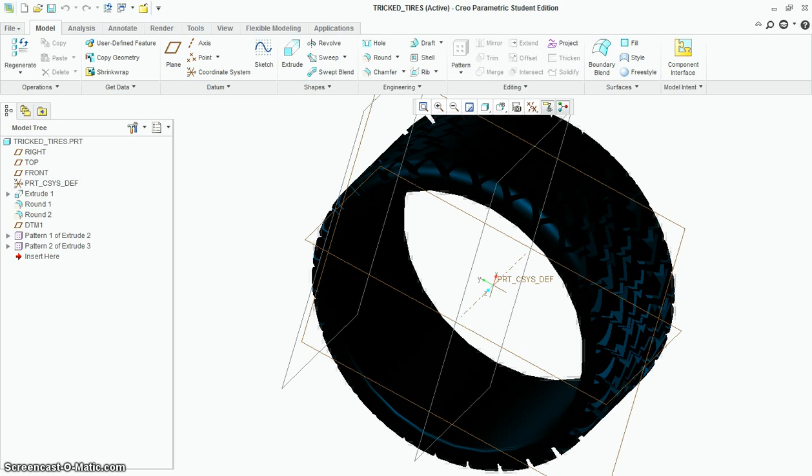Okay, this tutorial is on tricked out rims that will fit your tricked out tires. So you always make the tires first, it's just a little bit easier, and then the rims are made to fit the tire.

So we made the outside dimension of our tire 48, and we made the inside dimension 40. Now you can do whatever number you want inside there. That means the outside of my rim will have to be 40, and you build the inside any way you want. I made these 22s, 22 wide.

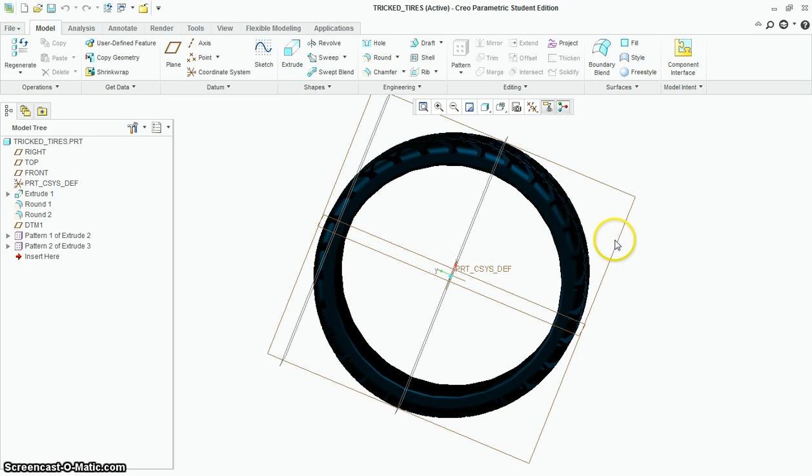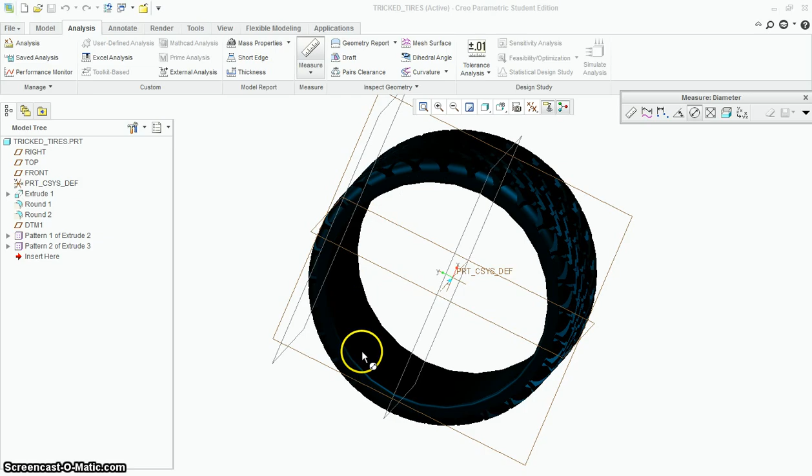So if you don't know what you did, you can check. You can go back into the file and open up the two-dimensional drawing. But I want to show you an analysis toolbar we have. You can go up to measure, and we can measure distance, length, angles, all kinds of things. I'm going to go to measure diameter, click on the circle here, and it says diameter of 40. So right on the drawing, I can come up with a measurement that'll help me determine how big to make the rim.

So then get out of this analysis, close out of this drawing, and we're going to start a new drawing, and this is going to be our tricked rims.

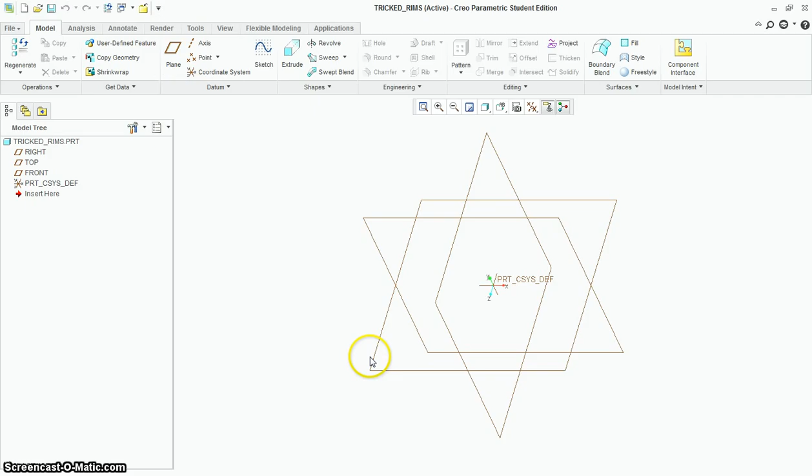Okay, so we're going to start this in a similar way that we did the tires. We're going to say extrude from the front, sketch view, and we're going to go 40. Don't make them 48, because they need to fit the tires. So 40, that's the outside of the rim.

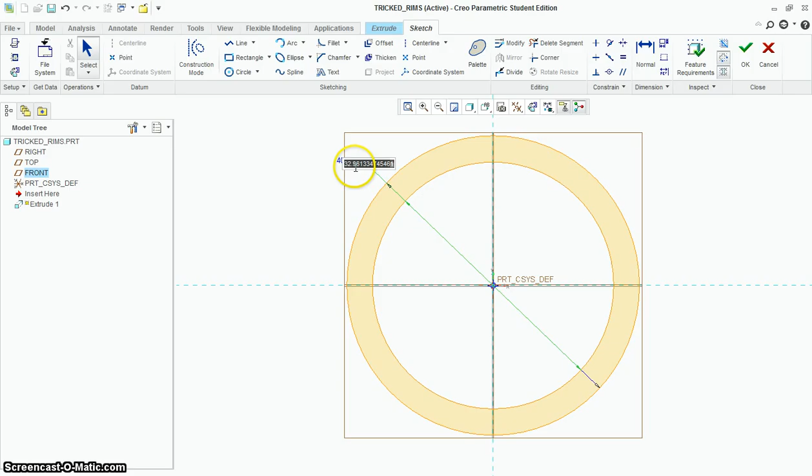Then the inside of the rim is whatever you want. So again, you pick the number, and I'm going to say, how about 38? Let's see what that looks like. Is that too thin? It's okay, alright, so we'll go with that.

Now you might want to opt to make the wheel hub right now, but I'm going to hold off on that, and I'll show you why as I get into this. You could make it now if you want, it just depends on what you're going for.

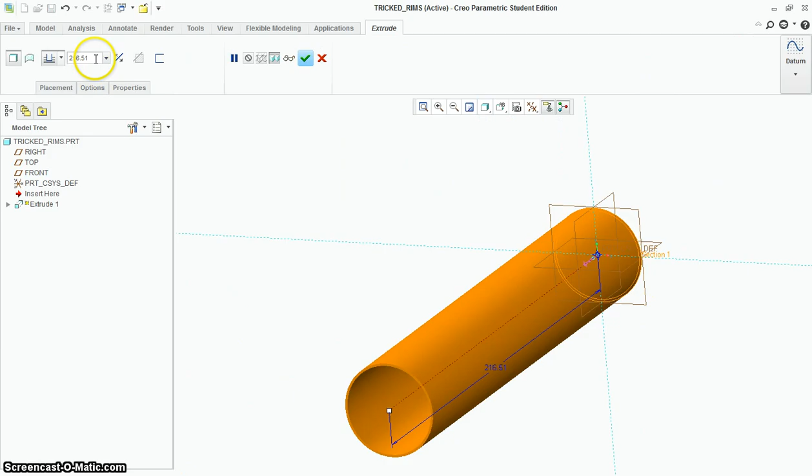So I'm going to go ahead and accept this. I'm going to go ahead and put in my 22s again, and there's my width. I'm going to go ahead and center this plane here. I don't know if I'm going to use it centered or not, but I'm going to go ahead and do that, and accept that. So there is the start of my rim.

Now why didn't I make the hub? Well, because I don't want the hub to come out as far as the rim. I want it to come out part way. This is just the style of rim I'm going to try to make.

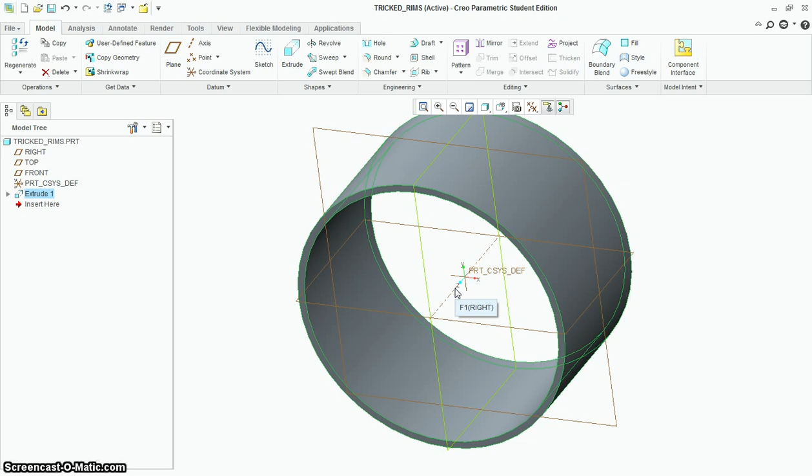So what I'm going to do is say, okay, extrude now from, well, you got a couple options, the back surface or this plane, or you could make a new datum plane, whatever you want to do. It's your drawing. And then go sketch view. And now I'm actually going to make the hub. So I'll just put this in here.

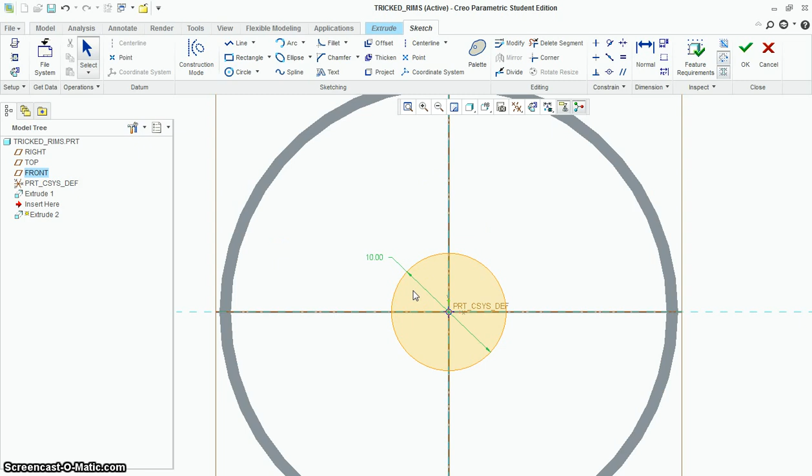This could be whatever size you want. I would recommend you use kind of whole numbers, it'll just make it a little bit easier for you to go back and figure out how big stuff is as you draw it. And when you accept that, you can see that it started here, and then I'm going to have it come out to the edge of the rim, which is half of 22, or 11.

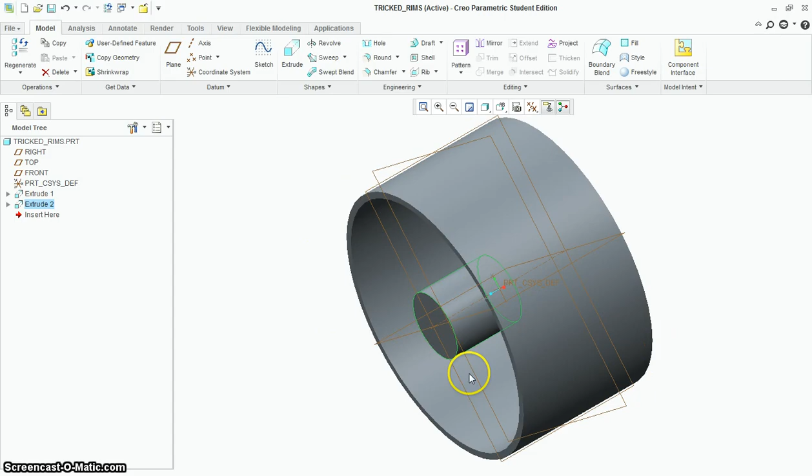So everything I'm doing now, just remember, is just how I happen to be doing it right now, not necessarily what you have to do. So there's a lot of freedom now for you to just make this your own. This is actually going to be the back of my rim, and this is actually going to be the front of my rim. So whether I picked front there or back, it doesn't matter, but as long as you know what you're doing. Okay, here's where things get a little tricky.

And I'll kind of give you a basic way to do this, and then a little bit more advanced way also. We need to make some spokes on the rim here, and so you could click extrude, and you could click this surface if you want, and you could draw some kind of spoke right here, and then we could pattern that around, and you could make it pretty basic.

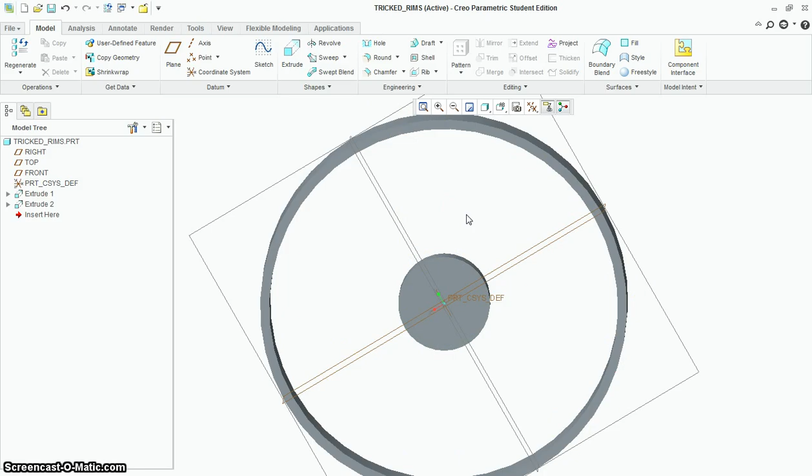And what I'm going to do is I'm going to use revolve, because I'm going to get a little bit more complex of a shape. So I'm kind of shooting for the moon here in terms of what the final product's going to look like. So I'm going to go revolve, and I'm going to click this plane right here, and then sketch view.

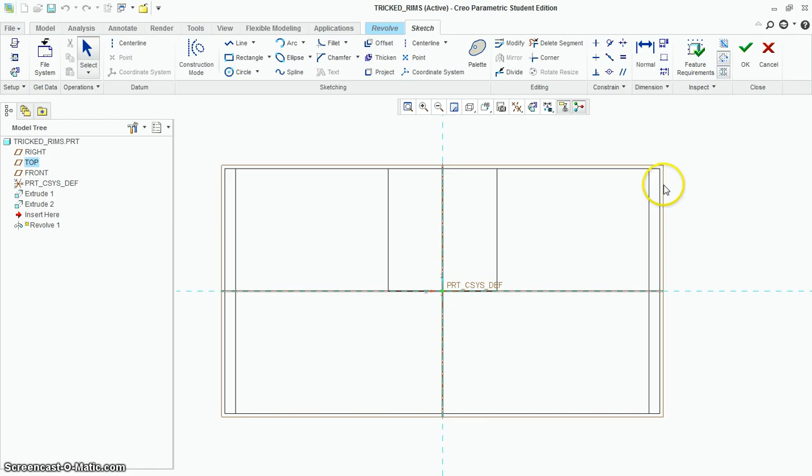Now I'm looking down on the rim, which might seem kind of confusing, but once you turn on your wireframe mode, you can see what you're looking at. Now I'm going to set some references. I'm not sure exactly where we're going with this, but here's the inside of the rim, here's the hub, here's that plane, here's the back of the wheel. I don't know what I'm going to use, so I'm going to set a lot of different things.

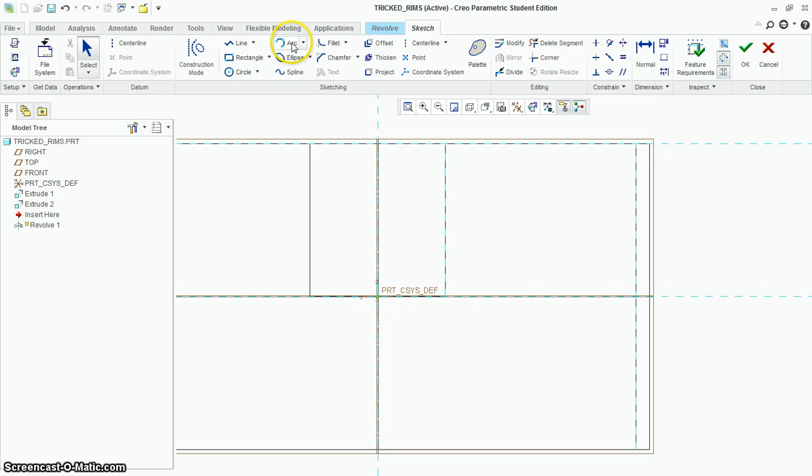And I'm going to make something that kind of looks angled. I'm kind of going for like an old IROC Z type of cool rim. So I'm going to go ahead and draw an arc in here, and I'm going to start it, let's see if it'll let me start it here. There, and pull it all the way to the center. And I'm going to have it come across here like this.

Now, you might be thinking, why didn't you just bring it to there? Well, remember this is rounded. So I'm going to bring it farther in to make sure it makes a good connection there and I don't have part of it missing. And then I'm going to do another arc right here.

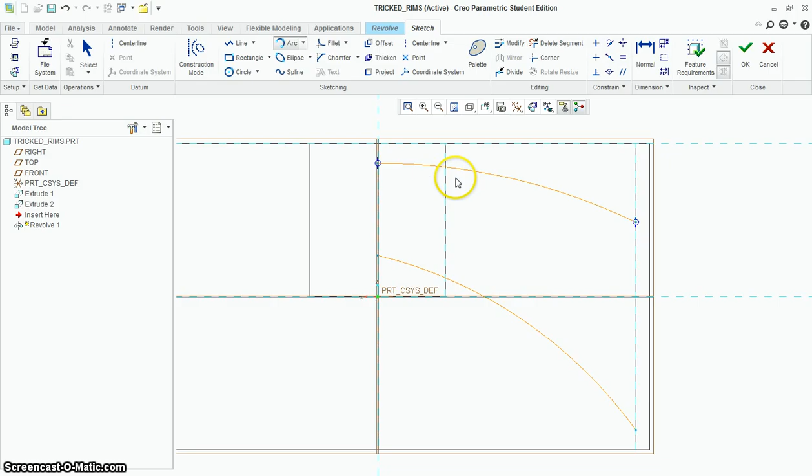And we'll just do something a little more subtle right here. Remember, you're doing a revolve, so you have to have a closed object, so close it again.

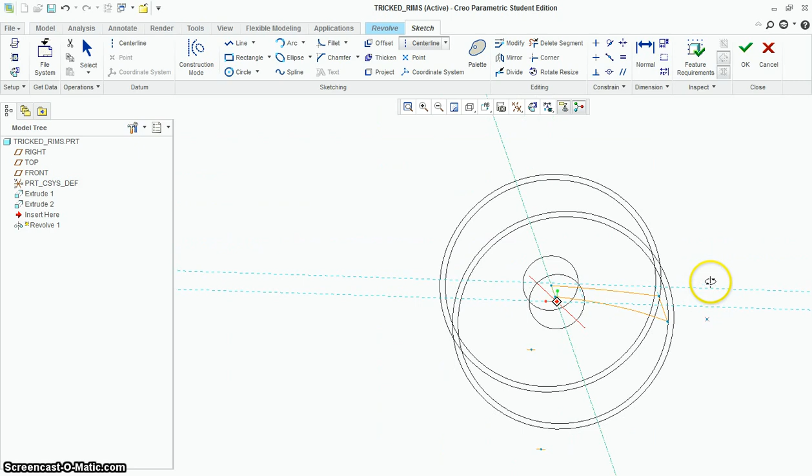Okay, so I've closed it. I've got this closed object. I need a center line because I'm making this revolve. Let's look at where we drew. I'm in this wireframe view, but you can see I drew on this top plane right here. If I go back to my shaded view, there's my shaded rim, there's where I drew, and I'm going to accept this.

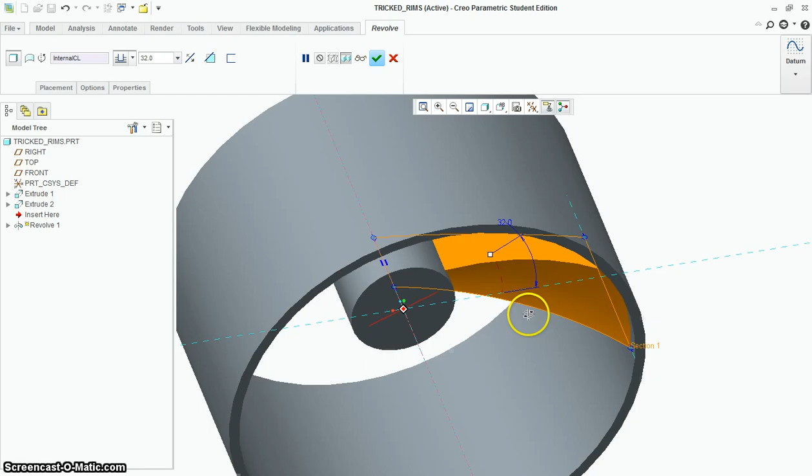Now, by default, it just spins it around 360 degrees. I don't want to do that, so I'm just going to make a pie-shaped piece of the rim here, and you can see it's angled on the front. That was one thing I was looking for, and the fact that it's pie-shaped there. I'm going to do some more with that. So this is the first step in this spoke, so I'll go ahead and accept that.

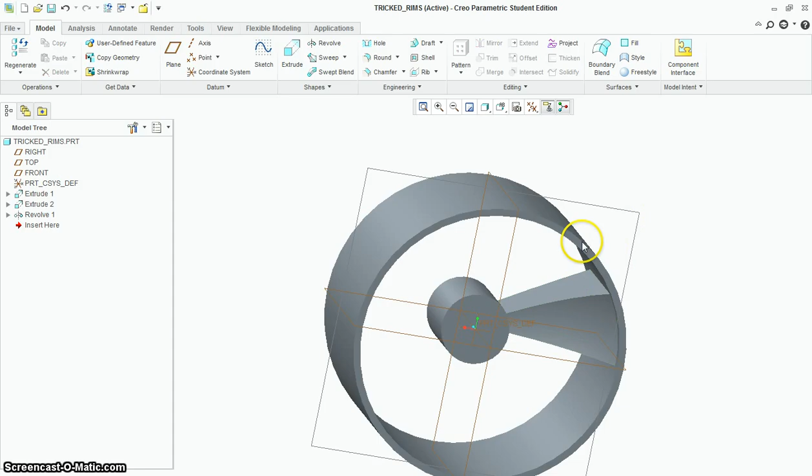Now you could just pattern this around and this could be your spoke, but what I'm going to do is cut and remove some stuff as a second step to make it a little more complicated. So I'll extrude from the front surface of the rim, sketch view, and I have to set some references. I'll right click, reference, and say where's this edge, where's this edge, where's this edge, all these different things.

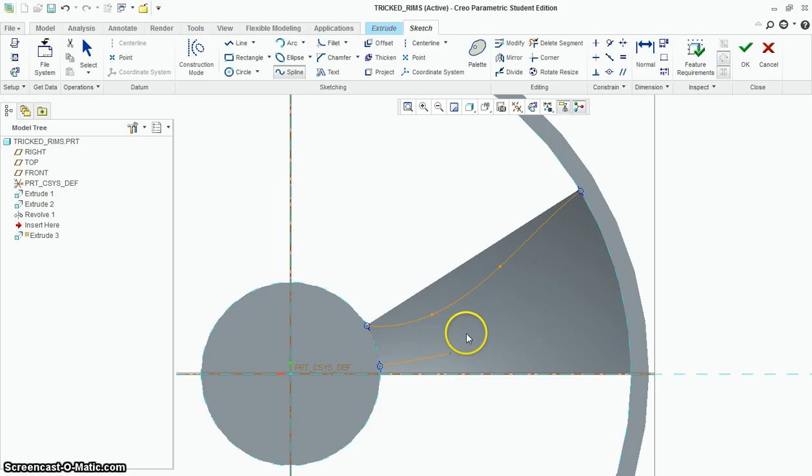And then I'm going to do some goofy drawing on here to make it look kind of cool. So maybe I'll do a spline like this, and middle click to end your spline. Okay, and then maybe I'll do a spline. Let's do something like this, and bring that out to here, and middle click.

Okay, and then I have to close this. Now you got to think about what you want to remove. I don't want to remove the inside, I want to remove the outside. So I'm going to come out here, go all the way up to here, and then close it out here. So that's actually what I want to remove.

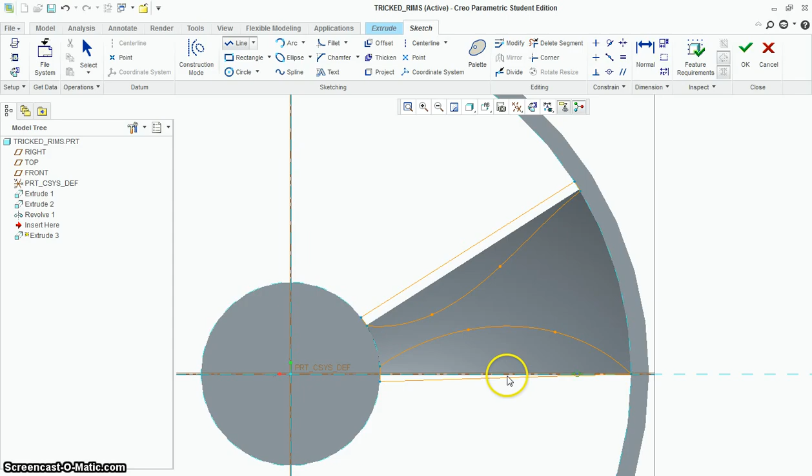And then I'm going to do the same thing down here. I'm going to come straight down, come over to here, and remove that. So hopefully it's closed, and when I hit OK, good, it sees it as closed. It's adding material, right? So one, I want to switch directions and come all the way through. Two, I want to have it cut away all that material. So remove material, and you see what I'm left with?

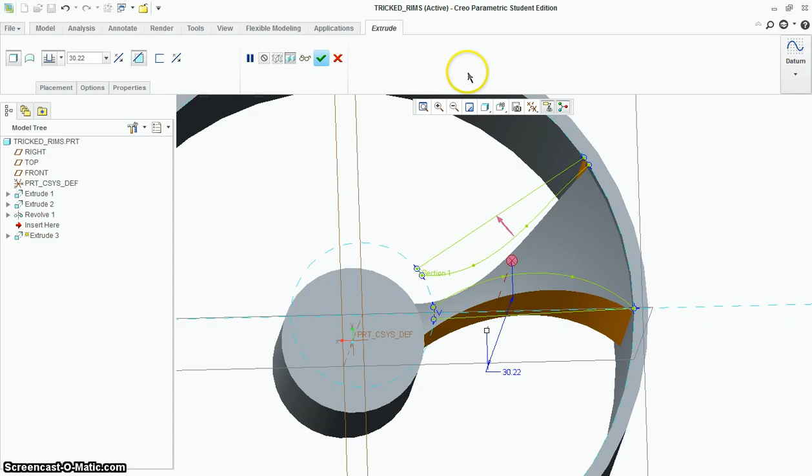I'm left with this cool little shape, angled on the front, all spliny on the top and bottom, and there you go. So that's going to be the start of my rim right there.

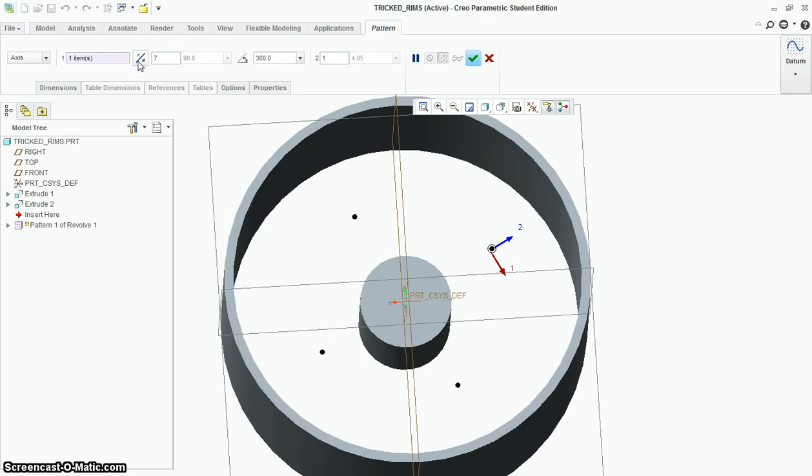Okay, so now we've got to pattern these things. I'm going to start with the revolve, which was my first part of that feature. Right click, pattern, you know how to do this. Axis pattern, and you're going to get this axis. You're going to hit the angle button, number of copies. I'm thinking 5, maybe 7. I don't know, let's see what 7 looks like. Is that too much? Maybe it'll be alright.

Then find this extrude 3, right click, pattern. Come up here, we're going to do an axis pattern. Find the axis again, it's running through the middle of the wheel. Angle button, 7 copies, and accept it. Look at that, I like them.

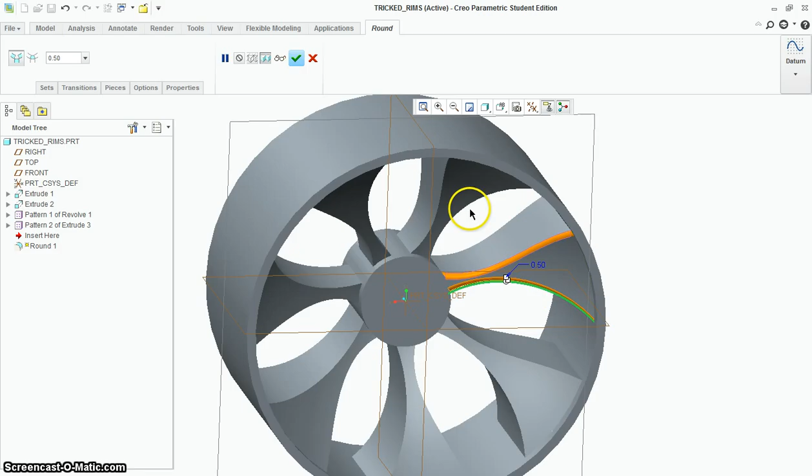Okay, now you've got to put some rounds and chamfers on to make these things look finished. So let's go up to round. Now it may limit how deep these rounds can actually go, so a lot of times the first number that it comes up with is something that will work. It's going to take a little bit of time here to go through all these different edges, but as we go around here, it's going to look better and better. Just give me a minute.

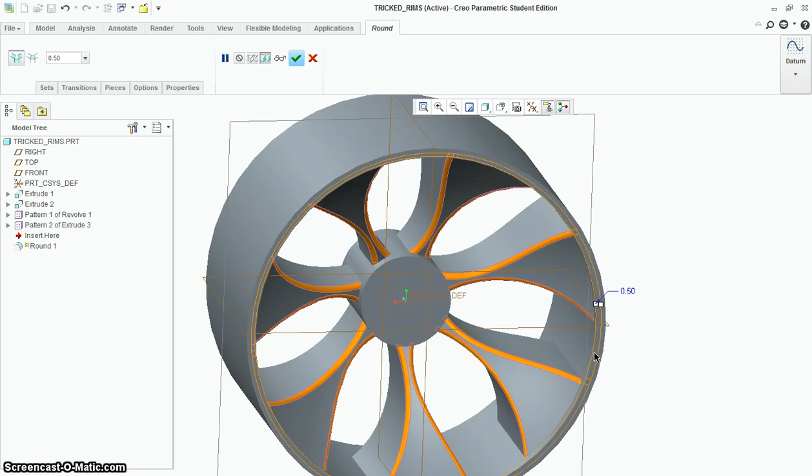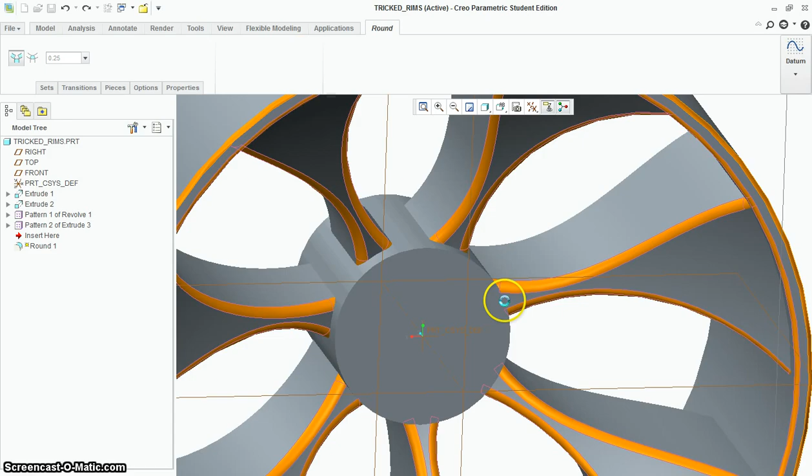And then let's go ahead and round this, and let's make this smaller. 0.25. And then let's round the outside of that, and that's already 0.25 also. Okay, so let's add a round on. Is it going to let me round this? No, so let's Control Z that last one. Okay, and accept this, let's see what we look like. Ah, that looks pretty good.

Yeah, nice. Okay, now we've got some facets here, some flat edges, probably the way that I drew that. So if you wanted to round this, you'd have to come around and get every individual surface on that, or go back and edit your drawing and just make it a little cleaner as you did it. But that's looking pretty good already.

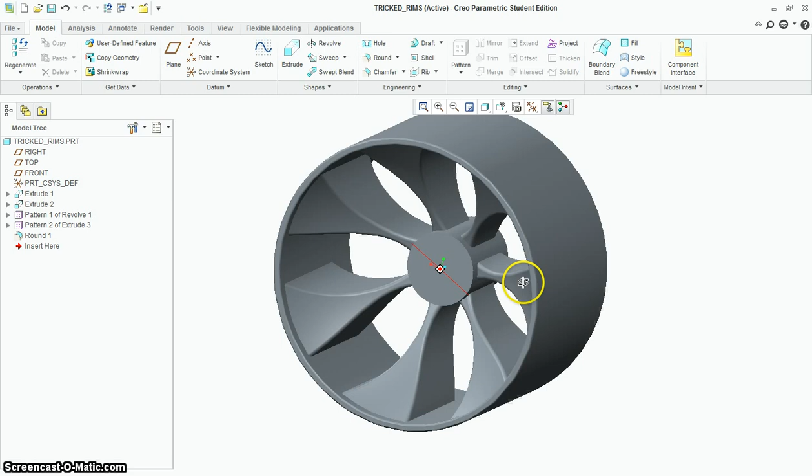Okay, so let's color this. Let's give it some actual material. Let's do like a polished chrome or chrome plate, that'll look good. And click on this plane here, hit OK. We got a nice chrome plate to that wheel.